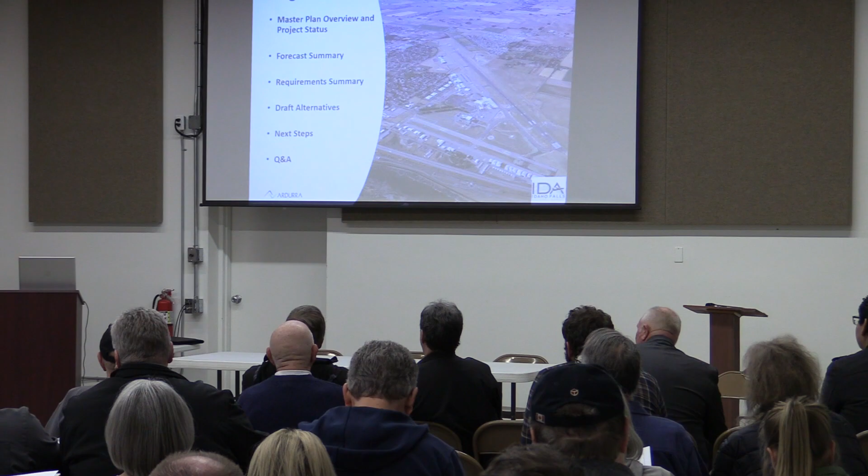So this is what we're going to go over during this presentation. We're going to go over what a master plan is, just as a review. What is the purpose of this project? Why are we doing this? And we'll give you an update on where we are in the process. Then we'll review the results of the forecast and facility requirements, because that is what led us to what we are here for tonight, which is the alternative. That's the main topic of tonight's meeting.

We'll break away from this slideshow, go over all of the alternatives, which you hopefully had a chance to look at. They're on the boards in the back. And then we'll come back to this slideshow, go over the next steps in the process, and then we'll have the question and answer period.

Can you still hear me okay in the back? Okay, great. What is a master plan? Why are we doing this? What is the purpose of this project? The short answer is it is a 20-year plan to safely and efficiently meet aviation demand at the airport. And that aviation demand is spelled out in the forecast. That's why we go with it.

We may come back to this statement because it's important to us: it's a 20-year plan to meet the aviation demand. We began this project in July of 2021. We had the first public meeting in August of 2021, that was the kickoff meeting. We had a second public meeting in October of 2022 to go over the forecast and the facility requirements. So that means that this is meeting number 3.

Normally, master plans take 2 years. We're 2.5 years into this project and counting. The main reason is because when we started, the effects of COVID were still impacting the industry, and there was a lot of uncertainty. So we needed things to settle down in order to develop a good baseline for which to do the forecast projections.

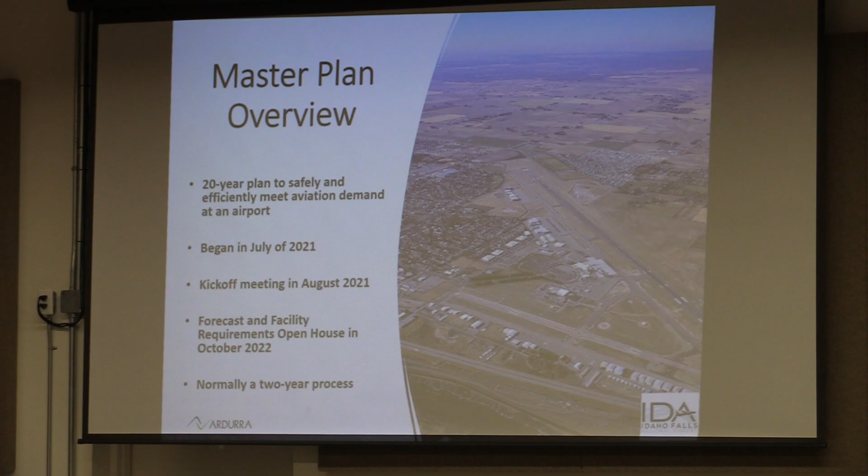The forecast. What is a forecast? This is as a review. Forecast is a projection of aviation activity expected to occur at the airport over the next 20 years. We broke this forecast down into 3 parts: the commercial forecast, which is mainly about the airlines and passengers, then air cargo, and then general aviation.

So here's the results of the commercial forecast. Enplanements, which is a person getting onto an airliner, is projected to grow at almost 2% annually. Airline operations, that means takeoffs and landings by the airliners, is projected to grow at 1% annually.

What we call the critical aircraft, which is a picture you see on the screen there, it's an Airbus A319 or A320. The importance of this is the representative aircraft for which the airport will be designed around, at least for the areas where the airliners are operating.

Moving on to air cargo. Cargo movement, measured in terms of pounds of cargo, is forecast to grow at almost 4% annually. This is a very high growth rate, the highest of all the forecast items in this particular forecast at this airport. Very important part that we need to plan around.

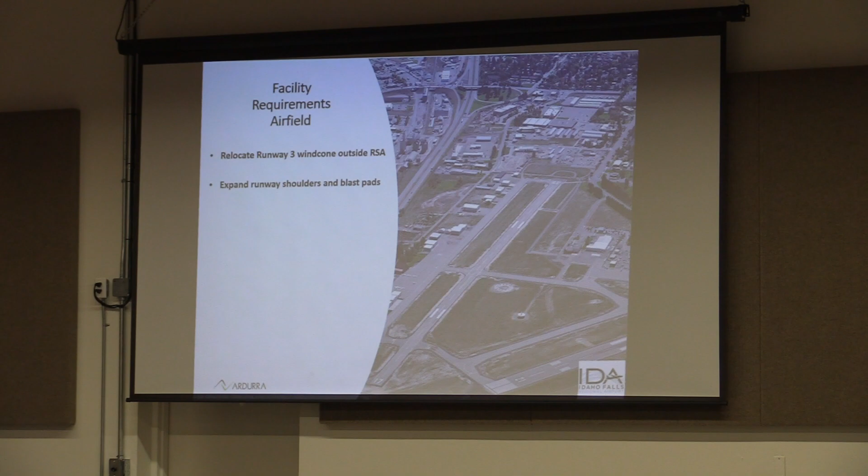The edges of the runways and the ends of the runways need to be expanded. That's not to say the runways themselves need to be widened or lengthened. Their length is okay, but the sides and the ends need to be expanded.

With the taxiways, there are some areas where the taxiways do not meet the design standard width of a taxiway, so they should be expanded there, as well as the shoulders off the sides of the taxiways.

It just so happens on the screen here, we're looking at the east runway. There's a taxiway that crosses the runway just about the middle. This is an area that represents a high risk of collision, and it should be eliminated.

The current de-icing pad is located right now on the terminal apron where the gate area is, and as it stands today, an airplane using the de-icing pad blocks the path for airplanes trying to go into the gates, and airplanes at the gate block the path of airplanes that can use the de-icing pad. So we're proposing to move the de-icing pad out of the gate area of the terminal apron.

And then what you see there, VOR-DME, is a navigational aid on the airport in the infield. On this picture it looks like a hat, right here. There's a clear circle around that navigational aid that should be clear of structures. Right now it contains hangars, so in order to ensure signal integrity for that nav aid, it should be relocated. But also relocating that nav aid will open up more space for development on the side of the airport.

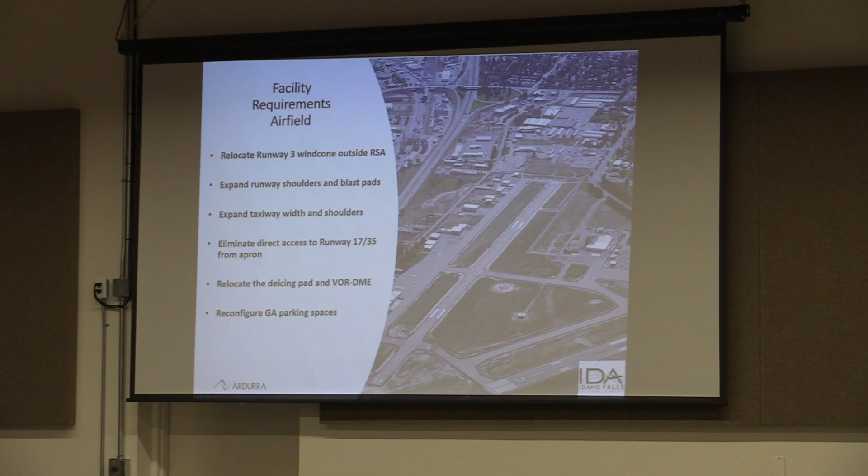There's enough pavement to accommodate your general aviation parking requirements. It can be met though through better and more efficient use of painted markings on the ground.

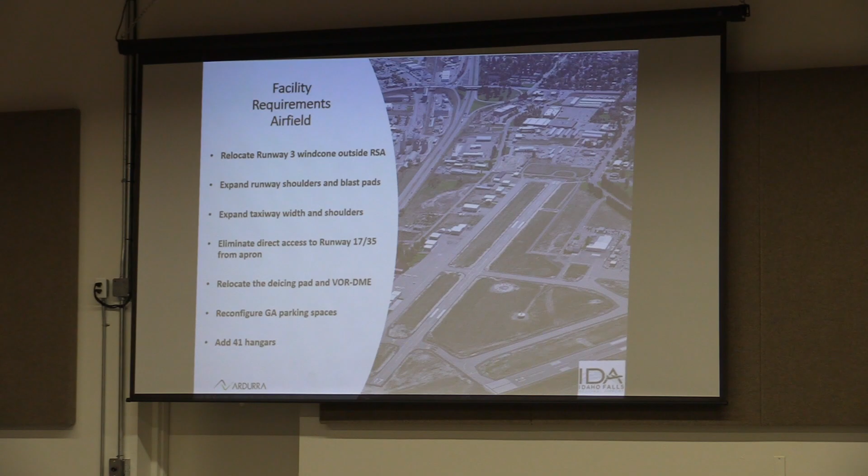And then this is the big one. There are 41 hangars needed by 2041. That's a lot of hangars to find a place for on the airport.

Moving to the land side, we're mainly talking about the passenger processing area. The terminal needs to be expanded, and two gates need to be added for airliners. All of the parking lots, that's the passenger parking, employee parking, and rental car parking, all of those need to be expanded.

The cargo apron, and I'm referring mainly to FedEx right now, the cargo apron where the airplanes operate needs to be expanded. It's too small and it's very constrained. And then the processing facility, that is the building itself, needs to be more than doubled. This is just FedEx alone. And then there's demand for a second operator, which hasn't even started at the airport.

Expanding the SRE building. SRE stands for snow removal equipment. It's where the city keeps their equipment to keep the runways clear during the winter. That building needs to be expanded, and the maintenance yard also should be expanded around it. On the screen here, it's right here.

The terminal access road, and this is referring to Skyline Drive inbound and the loop, it should be expanded as well.

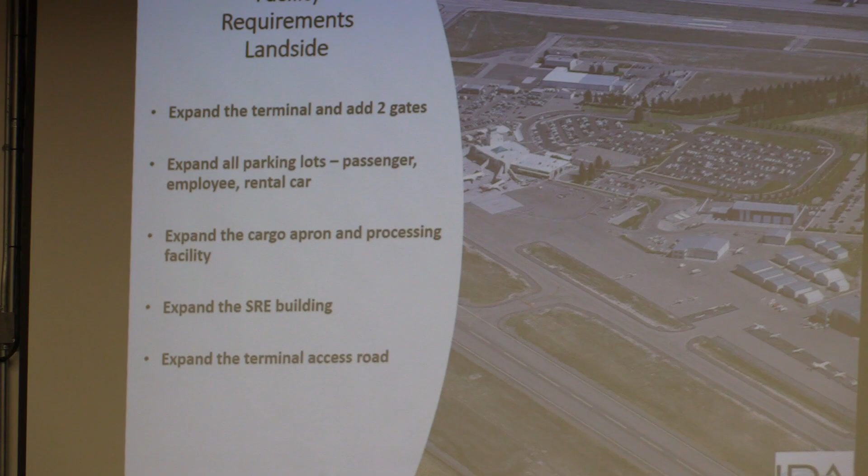We created some recommendations as well as the requirements. These are not required, but implementing these would help improve level of service and efficiency at the airport.

One of those, or two of them actually, the one you see on the screen there, is a relocation of the control tower and what we call the airport's fire station, the ARFF station. Both of them serve their purpose, but the tower is located atop the terminal building, and its placement there impedes further expansion of the terminal building. So relocating that outside of the terminal building will allow further expansion there.

And then the fire station, it also serves its purpose, but it also impedes expansion of cargo in particular. And relocating it to the west side of the airport, the main runway, would also improve response times to emergencies on that runway.

We recommend adding approach lights to the runway 3 end. This would improve access to the airport from the south by air.

Storm drainage capacity and structural integrity should be assessed. We know that, especially in the terminal area, the storm drain infrastructure dates back to the 1940s. So with development comes runoff, comes the need to accommodate that drainage. So it should be assessed, make sure that it can structurally handle it and can handle the capacity. That also means that we should be incorporating drainage features into the development.

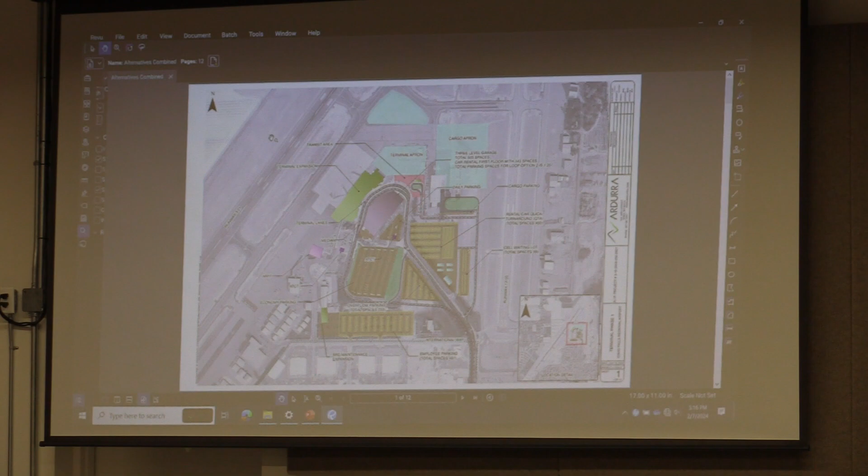These alternatives were broken down into 4 geographic areas of the airport: the terminal area, which is primarily for passenger processing; the east side, which is primarily for light general aviation; the south quad, which is for medium and heavy general aviation; and then the west side, which is undeveloped.

We'll start with the terminal area and work our way around the airport. This drawing here is what we're calling terminal phase 1. There's a lot of stuff going on here, but the main items to look at is that it assumes that the fire station, the ARFF station, has been relocated. It's not there anymore. One of those possible locations is right here, at the south end of the commercial terminal.

It also assumes that a parking garage has been placed inside the loop. We modeled a 3-level parking garage directly across from the terminal, and in that garage would go the public side of the rental car operation, what we call the ready return. This is where you would pick up and drop off your rental car.

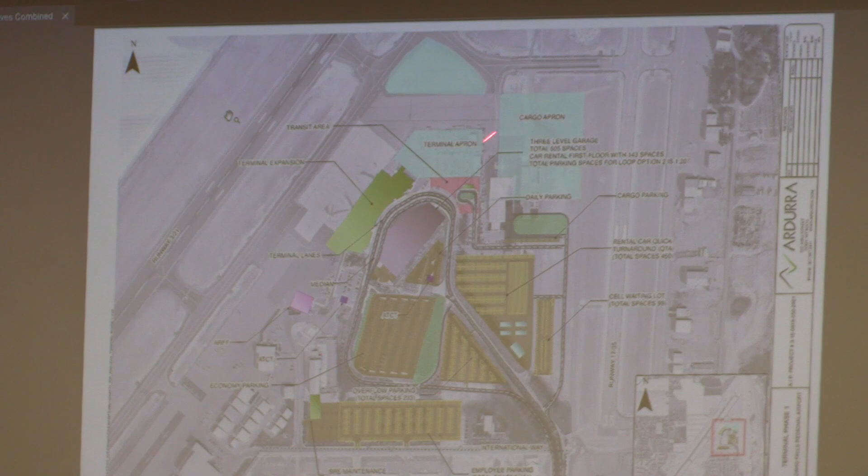That would go into the first level of this parking garage. It's covered, it's across from the terminal, and we get those rental cars off of an area that can be used for airplanes. The other side, the non-public side of the rental car operation, gets moved into a field that's not being used right now. That will create much more space for apron for airliners, and it will also get the non-public rental car side out of the skyline loop, so they're not having to drive through the curbside.

We've also shown in their place a small, temporary transit station for shuttle buses to pick up and drop off passengers at the terminal without having to go to the curbside. We're also showing some additional parking and circulation for FedEx, and an overflow parking lot.

Economy Lot 2 right here has been transformed into an employee parking lot, and that would allow the existing employee parking lot to be used as a possible location for the control tower. Another possible location for the control tower is right here in the loop.

For the actual Skyline Drive, it has been widened and the curves smoothed out to allow a little more efficient flow of traffic. I forgot to mention here, here's the cell phone lot, so that people can wait outside of the terminal loop and curbside until they actually have to go there.

We have the exit road extending straight through here, which means people will not have to go back towards the terminal and make a very sharp curve to exit the airport. Finally, along the curbside, we're allowing enough space for 2 full separate lanes to go through, so people can pick up and drop off passengers without being interrupted by others like Ubers, shuttle buses, and taxis. This is terminal phase 1.

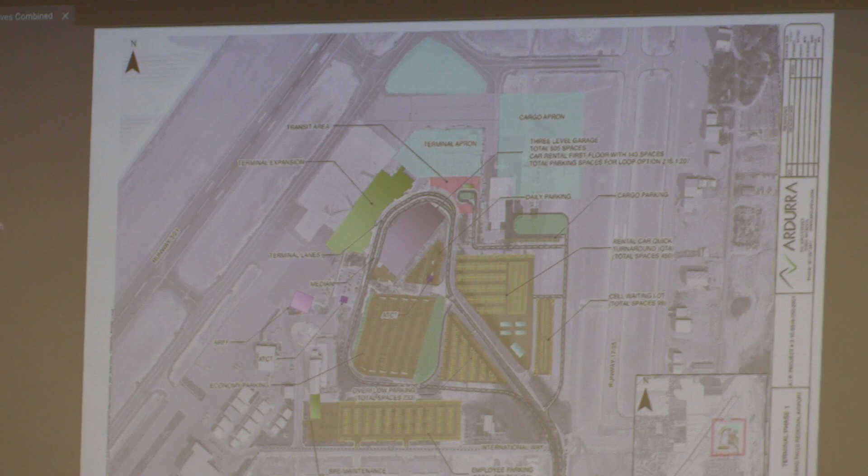We have a variation of this, we're calling it 2A, in the next drawing. The only difference is that student building remains in place, and could be used for airport administration or rentable space, but it also means the rental car would definitely stay in this area. Everything else here stays from phase 1.

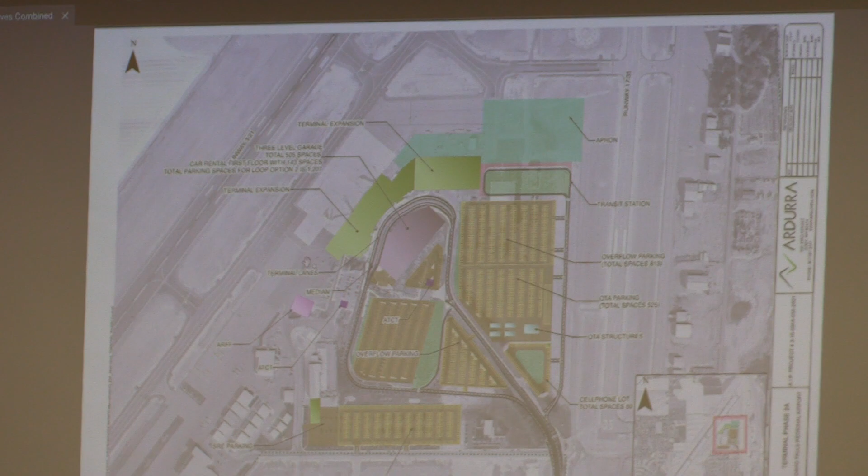So that's the terminal area. We're going to go to the east side of the airport now. In this drawing, north is to the right. For reference, this is the east runway right here, runway 17-35.

Right now, that area is dedicated to light general aviation. We show a continuation of that use by putting in additional hangars and taxi lanes for light general aviation. There's a retention basin right here that's used for drainage presently; we show it staying there because there's a need to accommodate drainage from the terminal area.

This parcel right here is currently occupied by a community garden. We're showing an overflow parking lot for rental cars there instead. As it is today, the overflow parking lots are at the south end of the runway, not a great place to have them since they're in the runway protection zone, so we have them relocated over here.

This is going to be a pretty key decision point of this master plan, and that is what to do with this runway. As it stands today, it's not eligible to receive FAA funding for maintenance, and that's due to crosswind and capacity. Which means that today and ongoing, maintenance will have to come from local funds, that being the airport.

So there's a decision that is going to have to be made: one, keep the runway as a runway and maintain it locally with local funds, or close the runway and turn it into a taxiway, at which point it will become eligible for FAA funding. This particular drawing shows development that could occur with or without the runway open or closed.

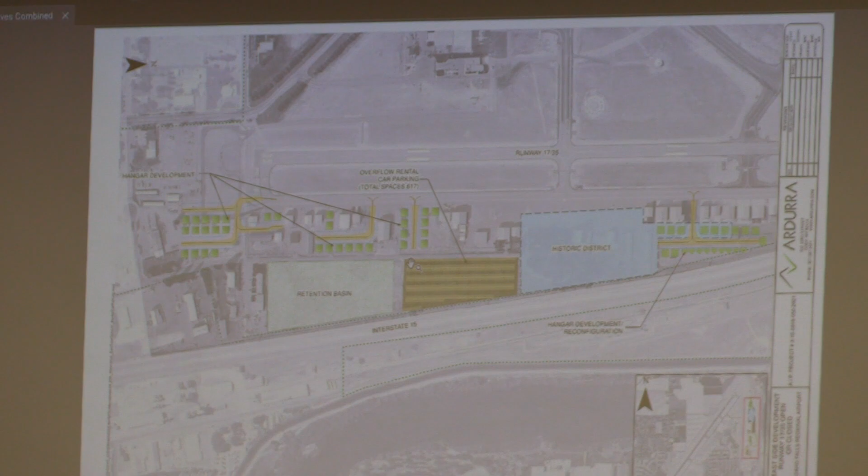By doing so, closing the runway turns the airport into a one-runway airport, and all of the air traffic will then be on one runway.

We have another drawing, it's a variation, it just shows that there's lots of space by closing the runway and turning it into a taxiway for hangars and tie-downs. Remember, this is an important decision point for the city to make, so it's what to do with the runway.

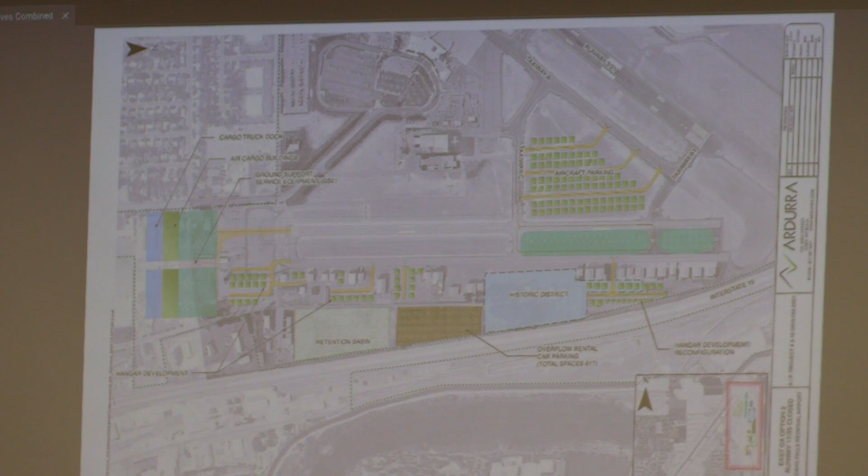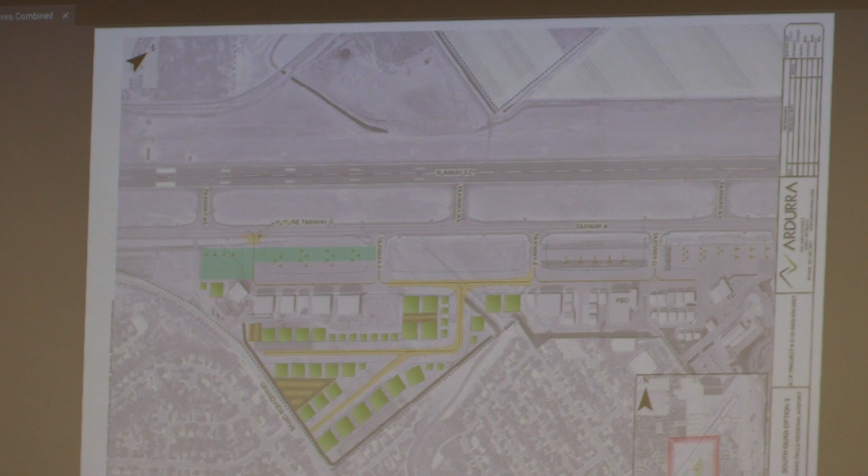So that's the south quad. We'll go pretty fast through that one. And the next one is going to be the west side. This particular drawing we're calling phase one.

Phase one includes the full-length parallel taxiway west of the main runway. It also shows space for FedEx plus one additional air cargo operator, plus possible locations for the ARFF station on the west side here and here, plus a possible location for the control tower here.

There's a parcel that's shown here as being future land acquisition. That's actually not a new proposal, it's an existing proposal that we are showing here. But in order for this phase one to be fully built out, you have to acquire that property. If it's not acquired, you can still do a partial phase one, build a partial parallel taxiway, and space for FedEx on the west side of the airport.

A couple of key points about this alternative phase one is that it maintains the existing Old Butte Road alignment for access to the west side development. Now that road may need to be widened or strengthened, but still it maintains the same alignment.

Also, going back to the east side runway alternative, if it were chosen that that runway be closed and cargo would be placed on the east side of the airport, then this alternative would not be projected to be needed through the planning horizon of this master plan, which is 2041. Your cargo needs would be met on the east side. If runway 1735 stays open, then this alternative does come in within the planning horizon of this master plan.

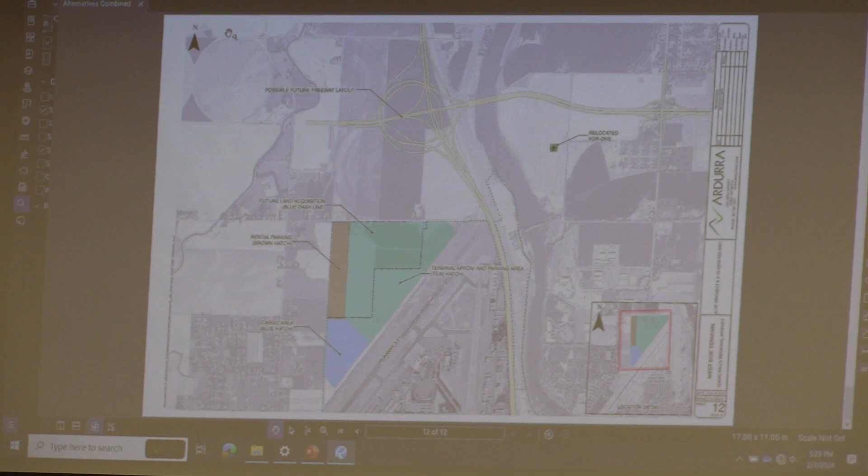We're also showing a possible relocation of that navigational aid I talked about earlier into this field out here, in line with the runway.

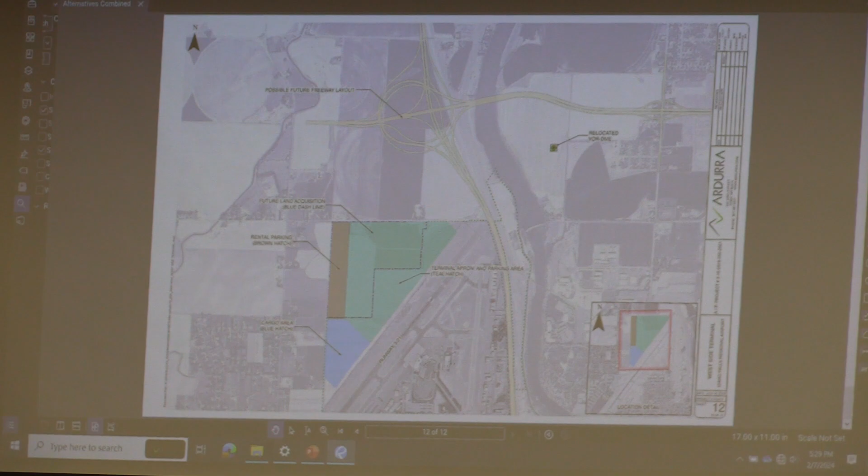And that is all of the alternatives. I'm going to go back to the PowerPoint. I'm sure we'll come back to these drawings during the Q&A.

Okay, next steps in this master plan. We're going to allow a period for additional public comment after this meeting, because we know that there's a lot of material for you to digest, and you may want to sleep on it, and you may come up with something after this meeting that you would like to submit your questions and comments.

So we're going to allow an opportunity for you to provide comment after this meeting. Once that happens, the city and airport staff are going to have to make a decision on what to move forward with. They will select a preferred alternative. This is going to be a required step before the project can continue.

Once that happens, then we will develop an implementation plan. And that implementation plan is how you're going to turn the preferred alternative into reality through a series of projects, project description, cost estimates, phasing, how you're going to turn that preferred alternative into reality over 20 years.

We will also complete the airport layout plan, which we call the ALP. The ALP being really the primary deliverable of this project, the master plan being the justification for the projects on the ALP. But this will represent the last chapter to be written for the master plan report.

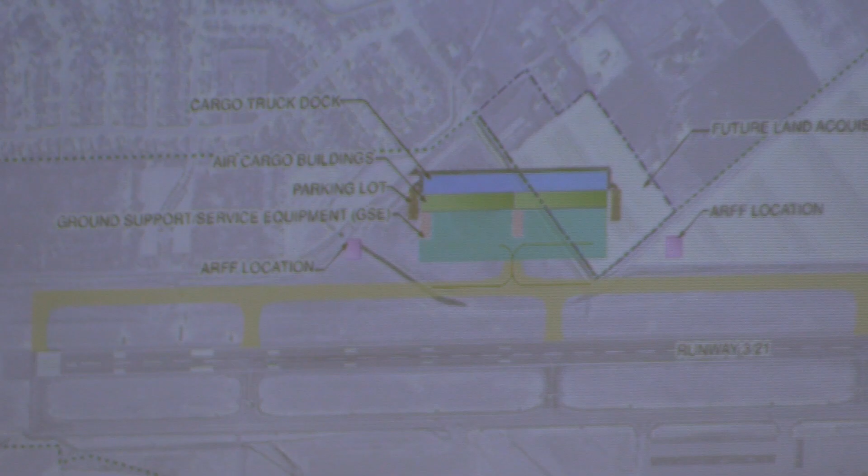That's why I have the slide. This is a picture of west side phase 1 where we envision FedEx to go, right here. This is actually existing airport property. In order for a second operator to go in, you'd have to acquire the parcel next to it. This would be where FedEx goes, with 1735 remaining open under this proposal.

Regarding removal of 1735, what are the potential consequences? An alternative runway in case of 321 closure—so what would happen if 1735 is closed and 321 is also closed for some reason? The answer would be you'd have no open runway until that reopens. There's a second part to this question, let me get it—it just expands upon that.

If they close the current GA runway and all aircraft use the main runway, can there be flight path restrictions to prevent GA planes from flying over the neighborhoods east and west of the main runway? The FAA has pretty strict rules on placing restrictions for airplanes in flight, so the short answer would be no. However, the airport could seek to work out preferred flight paths with the GA community to help avoid impacts to residential areas. But as far as placing restrictions, that would not occur.